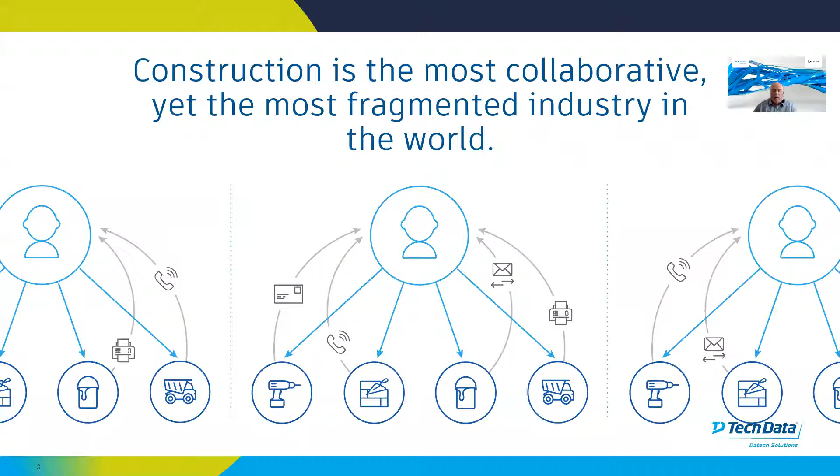It potentially exposes team members to not be working on the right version of reality. This primes your team to missing deadlines, decreasing productivity, making errors, and I'm sure that all sounds quite familiar to you.

The other thing we're looking at here is, as we know, margins are razor thin in the construction industry, the largest in the world economy. About $12 trillion globally will be spent on construction-related goods and services by the end of this year alone. It accounts roughly for 15% of the world's GDP and employs about 7% of the world's working age population.

So these low margins are also reinforced by a number of internal and external challenges, such as reinventing the wheel. Even though problems are often very similar, each project team still seeks its own solution, and there's no standardization.

Extensive subcontracting is a challenge for coordination and communication. And we're coping with complexity these days that we never did before. There's also a failure to adapt to new technology.

The same report also lists a number of important initiatives which the construction market can reform, providing opportunities to meet the challenges we've just seen, and to turn these ideas into real work processes. Basically, that's the goal of Autodesk.

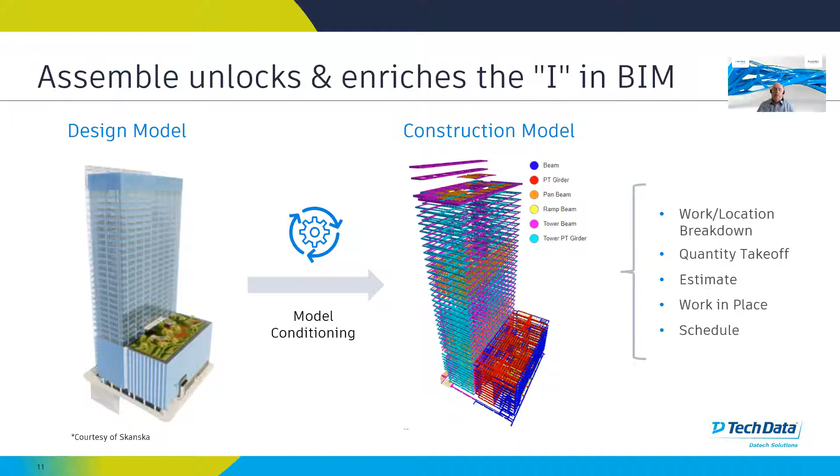It's also giving opportunities to make the handoff process from the pre-construction phase to the construction phase a seamless experience, with a number of important workflows on the left, such as automatic quantification, conditioning of models, and change analysis.

And I guess what we're really looking at is you. All of these workflows are based on what you need and what you want to achieve. With Assemble, you manipulate the data yourself so that it's relevant to what you need and want to achieve. You filter the data you need, and you group the data into the structure that is necessary for your work.

As a result, you immediately have the right quantities. You will have an immediate understanding of which data has changed with new versions, and you can add your results into the BIM model to share with the project team. This is how we get collaborative project teams.

Let's have a look at this in action. We're going to show inside Revit, and here you see the Assemble add-on. Let's put it in, and we get a ribbon. We just choose the right hub and then the project that this model needs to go to, and it will know all of the linked files, so we can actually upload all those linked files in one go.

As I said before, it's in any format. So if we do the same in Navisworks, you've actually got the Assemble add-in in here as well. So here we have two files, an FBX file and an IFC file.

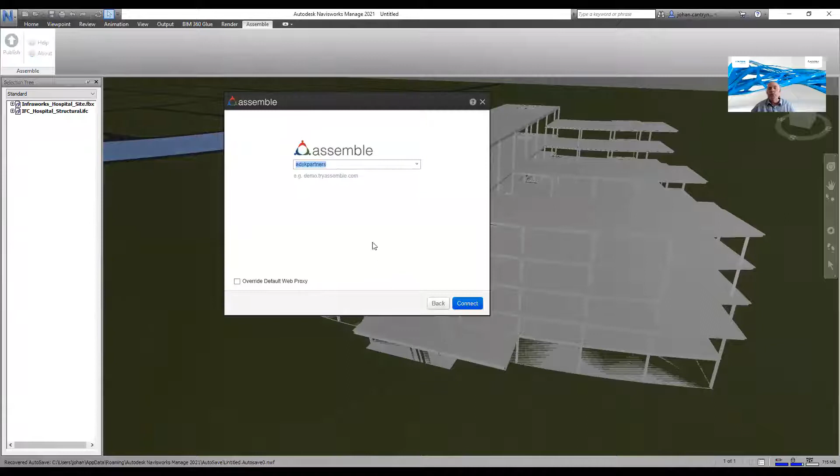All we need to do is go to the correct ribbon, the Assemble ribbon, and we have a simple button that says Publish. Again, we need to choose the correct hub, connect to that hub, and then choose which project that needs to go to. Again, we can choose which file format we actually want to send up. So if we wanted all of them, we just pick Continue, and all are put up there.

So this is Assemble. This is what we see inside a project. We're actually inside this project, and you'll see all of those models in there from either AutoCAD, Revit, or indeed Navisworks.

So now all the data is in Assemble, the whole team can actually review the models. Anybody you've invited can gain access to this. This can be done via iOS or a normal web browser, in which we can not only review the 3D models, but also the 2D sheets, which is important because they contain extra information.

The team not only has immediate insight into the complete model, but through real-time sectioning, we get an understanding of every detail. In order to make the right decisions at all times, we always have an overview of the spatial relationship. Measuring, isolating nodes, etc., are options that support this.

Let's have a look at that. In this case, we're actually looking at one particular model, and we can view this in multiple ways. We can actually start to change how we visualize this.

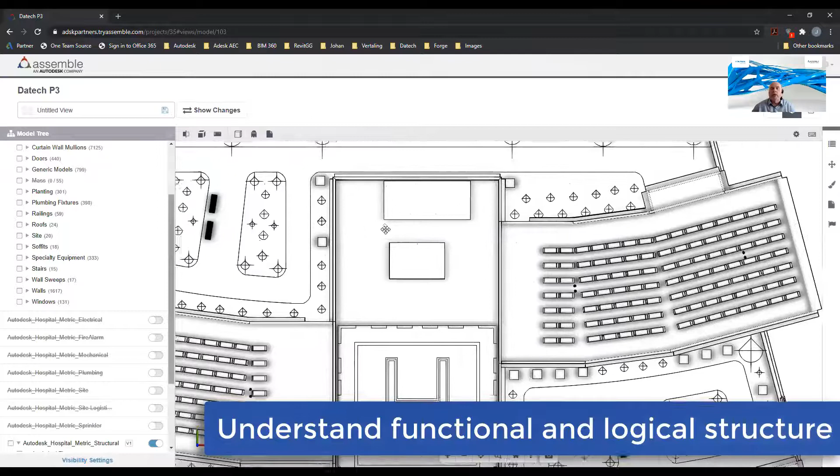So we can actually set, in this case, a hidden line detail. We've also got our set views that we can switch between as well. So here we've gone back to a shaded view on one of the elevation views.

So the other option is we've got the ability to turn on and look at the drawing sheets as well. All of the drawing sheets that are pushed up with the model are available to everybody, and we can actually see these side by side, whichever drawing sheet we want, alongside the 3D model. In this case, we've got an elevation.

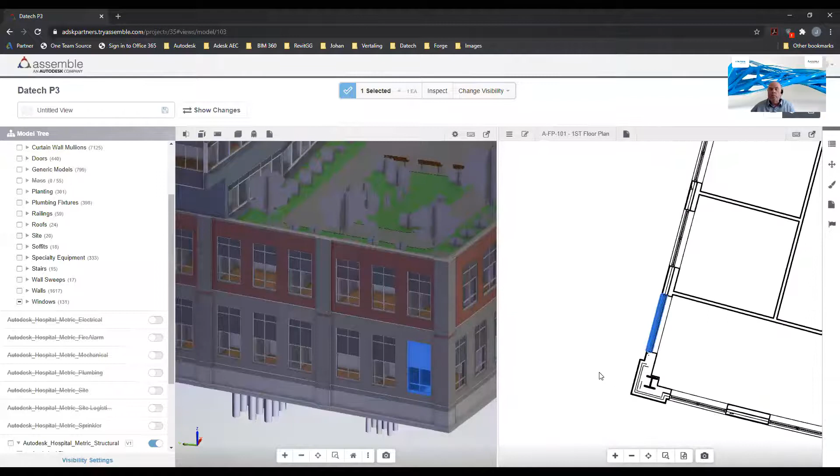Let's change the 3D model around to the same type of elevation. Now if we select an object in the 3D model, you'll see that the actual object is visible inside the drawing sheet, and as we click through we get the same thing. If we turn all these drawing sheets on, because we've got that window selected, it'll give us the drawing sheets that only that window is visible in. So we choose one here, it's a plan, and you can see it's still selected. Again, we get a greater correlation between the 3D model and the 2D drawing sheets.

And just like inside Navisworks, we can actually walk and explore inside the building, inside this viewer as well.

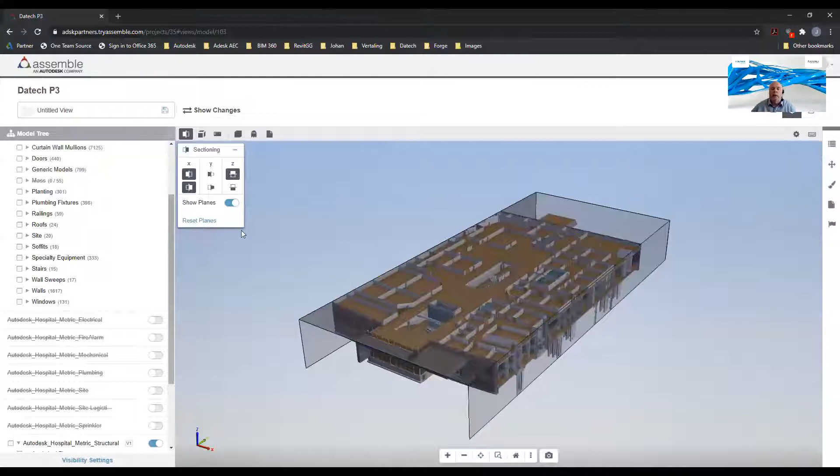As you can see here, we've also got cross-sectioning, so we can choose which axis we want to actually section this, and we get two cross-sections on each axis, so we can do exactly what we're doing here. Then we can turn those planes off so we just get the actual model, which gives us a better understanding of what's inside the model.

And again, we can start to change the visualization of this as well. So in this case, if we wanted a hidden line view, we can do so.

We can also start to highlight objects inside the model tree. In this case, we've got a specific door we're interested in. What I love about this is we've got X-ray vision - we can turn on the X-ray vision within that section view, and it will show us all of those doors within here.

And as with many other views, we've got the ability to start to measure within here. So we can put some measurements in and check what measurements we need. Even if they're not on any drawing sheets, we can create our own dimensioning.

So now that we've put the models up there, and put all the linked files in there, we can start to aggregate these models. So if we wanted to see a couple of models together, but maybe there wasn't a Revit model that had this information in it, we can do so on the fly inside Assemble.

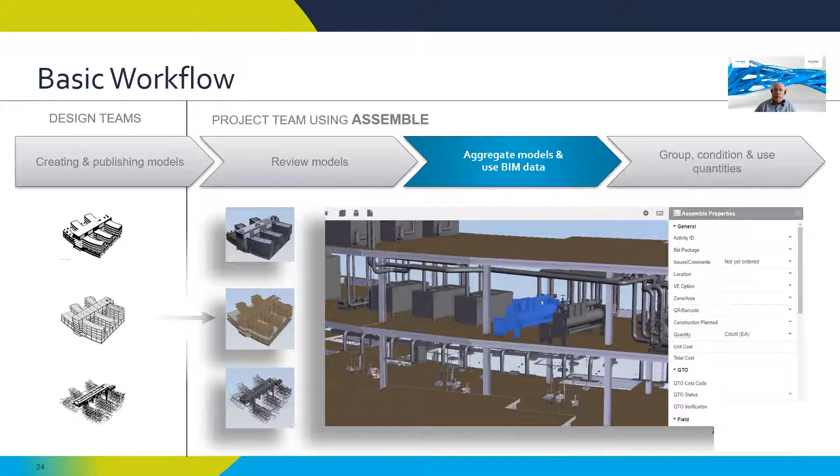The project as a whole is important to the team, and that's why we can combine models on the fly into one virtual project environment in which you then filter the data that you need for your job. With Assemble, we also have access to a rich BIM data source. However, a BIM model usually does not contain all of the data required during pre-construction and construction, and Assemble gives the team the opportunity to add this data so that it can be consumed by the whole team.

So let's have a look at actually opening a model up and aggregating a view for ourselves. We've got multiple projects here, so if we go to this particular project, these are the models. If we actually select one, in this case we'll go to the structural model.

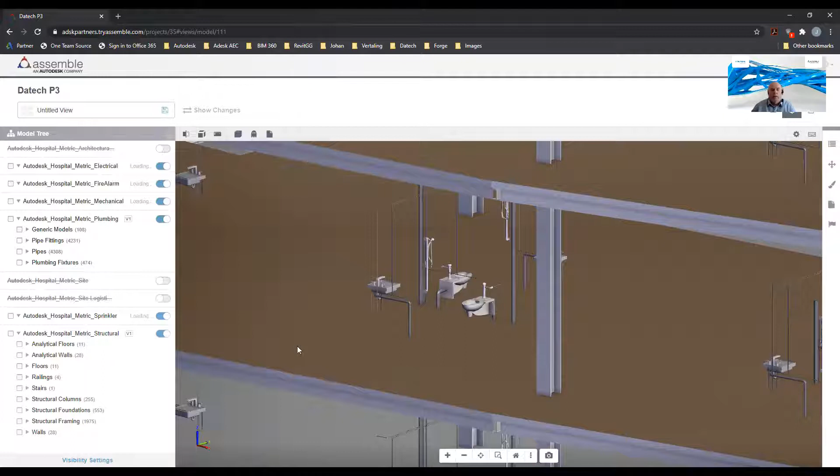And that's great, we can see all the structural detail, the information there that we need. But in this case, I want to see the structures with some of the building systems, so let's turn on the plumbing. Now we have both the plumbing and the structures together. In this case, we'll turn on the electrical and other building systems as well, and we can see this information together. So we've got control over what information, what models we see together.

And this can be stuff, again, from Revit or from Navisworks. So in this exercise, what we can do is just turn all of the different models on, so we can see all of these models aggregated together.

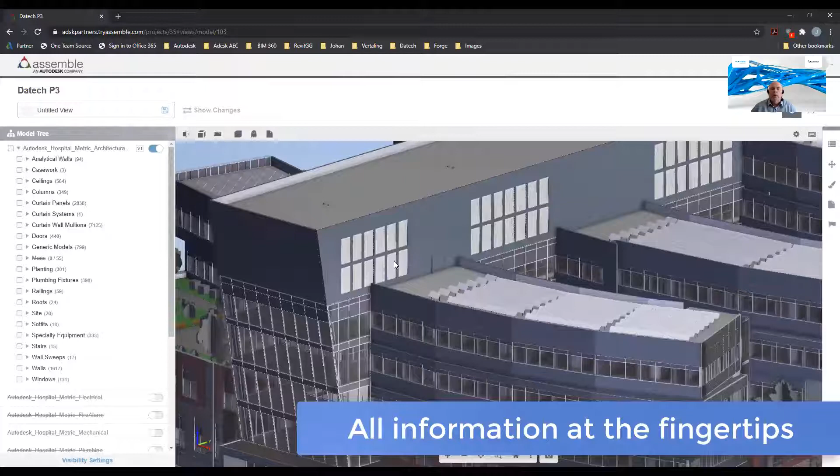So at the very beginning, we saw that the title here was Putting the I in BIM. So all that information is there. If you hover over anything, we get an idea of what it is and also the quantities.

We can also select an object and turn on the properties. These properties all come from, in this case, Revit, so we get all of the Revit properties available to us in here. We can check out dimensions and so on.

But we also have the ability to have Assemble properties as well. So in this case, here are our Assemble properties. You can actually create these properties as you want. In this case, we've got a bid package, so we're adding this to a bid package called brick walls, and we can give it an activity ID at this point as well.

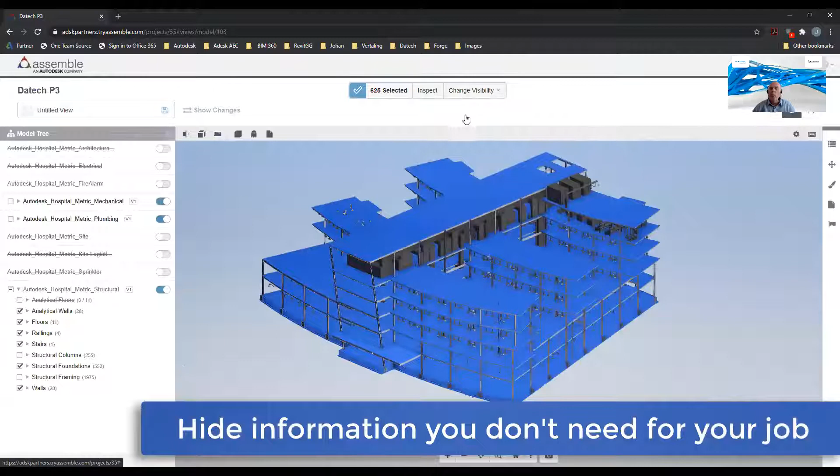And all this information can be seen within the model tree. So as we said before, it's the information you need to do your job. In this case, we're going to turn off some of these objects because we don't need everything in here. But we're also going to filter out some of the things we don't want inside a particular model. We want the structures, but in this case we only want the steels. We've also still got all of the building systems here, all the mechanical and plumbing.

Now, what is good is obviously we need this information back again, so another day we could come back for that information. We can save those particular views, and they'll be available to us and the whole team to view. So here we see a few views that were created. If we wanted to get to the field steel view, we just pick that view and everything's preset for us.

And the same thing if we just wanted to see, in this case, walls. This is for a quantity takeoff, so if we want to do a QTO on just the walls, this is the view we actually need. And if we need that information to go to other people in the team, it's available for them as well.

So we've seen how we can aggregate all our models to start to see the information that we need. Now we'll take a look at how we can further Assemble's ability to group, condition, and use quantities.

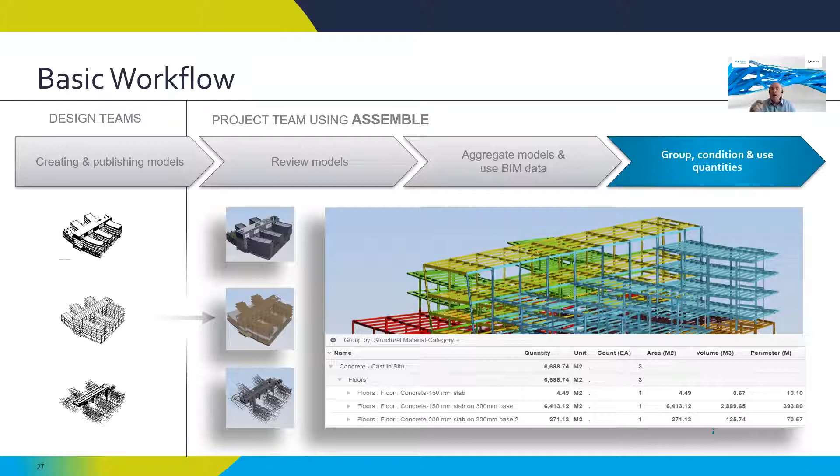Now, I think this is where Assemble sets itself above anything else. Via the inventory, we get a global view of all of the BIM information, and it also automatically shows the quantities using any structure per object, per level, per work package - you can choose yourself. Of course, you don't always need all of the data, so with the dynamic filters, we can determine exactly what you need for your job.

And to gain a better insight into the data and also to improve communication with other team members, we can automatically assign colors based on the BIM information, as you can see on the screen here. And then you save the condition model so that other team members can use this information - again, another proof of Assemble's collaboration. So let's have a look at how we can do this.

So in this case, we've got the 3D model here again, and here we can see the doors. We can actually specify specific doors. We can see that it's listing out walls and all of the information that we need. But if we wanted more information, we can do so.

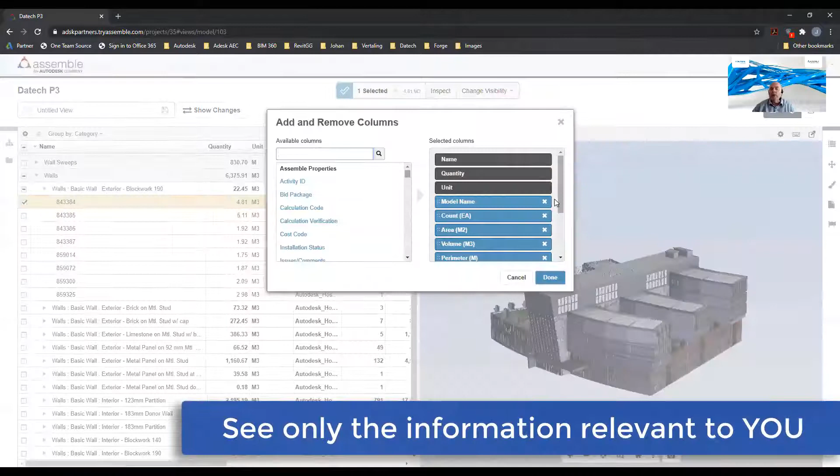We can choose which columns we see, so you can determine what columns you don't need. In this case, we don't need perimeter, but we might need, in this case, the function - whether it's an external or an internal wall. Then maybe the structural material - we might need to know what the material is for that particular wall. And then it'd be great to separate this out by level.

So now if we look at the walls, you've got all the information you had before, but now we've got the function, the structural material, and its level. So again, we can see not only this information in the structural team, but the actual model changes as well. So in this case, if we highlight the rectangular ducts, we see them highlighted inside the model.

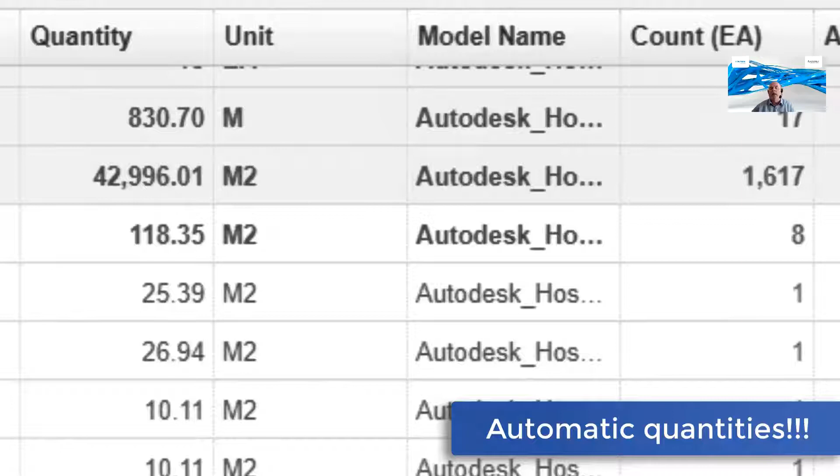So it's not only just the information that we've got there, but we've got those quantities, and they're intelligent quantities. In this case, we've got the length of that particular steel. And it also groups the information together, so we can see not only the individual quantities, but we can see the grouped quantities as well.

Okay, so in this information we've got things like doors. Doors are set to each. It's exactly what we need.

And if we go to, in this case, the railings, here we've got a pipe railing. We actually have the length of pipe railing.

And again, with the door, with the walls, we've actually got square meters, but we can change this. So if we wanted to see cubic meters for this, the volume rather than the area of the walls, we can do so by changing it in the properties. It will automatically change in the actual tree that we see here.

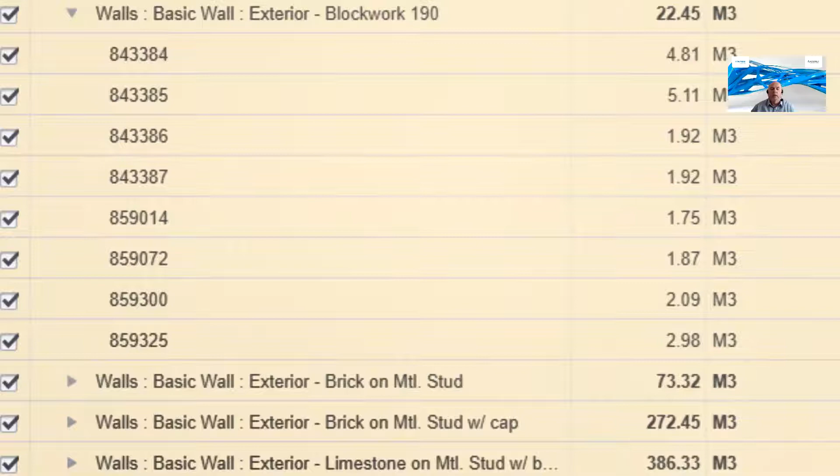So in this case, we're going to see three examples of how we can structure that information together. At the moment we've got everything grouped by category. What we're going to do is tell it to show only the walls, but we only want walls.

We don't actually want curtain walls in here. So we can filter the view to only show us walls without curtain walls. Now we can only see those particular walls, which is great.

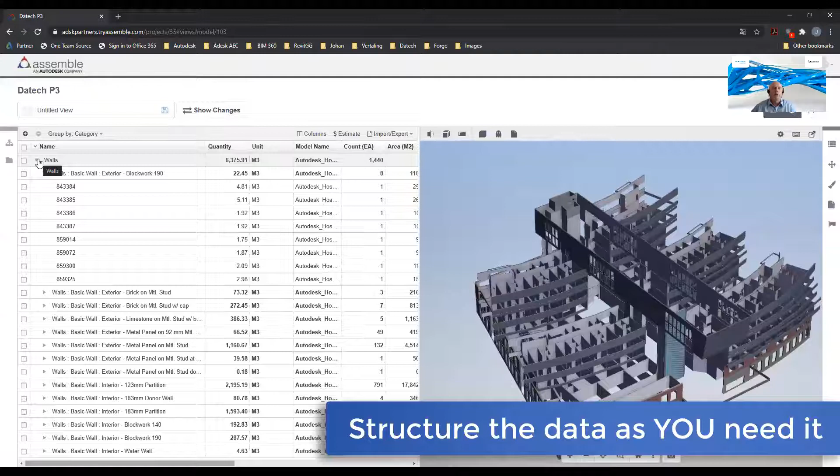But we need now to maybe group this differently. We don't just want walls and the type of walls. We actually want this grouped slightly differently. So we're going to change how this is grouped by, and create our own grouping.

In this case we'll just call it walls, function, level. Remember, we turn the function and the level on. So we want this grouped not only by walls, but by function, whether they're external or internal, and then the level as well. So we're changing the structure of how we see this tree.

So as you can see here, we've got the exterior or interior and then the levels. And we can actually view this - if we highlight these, you see the levels appearing on the model as well as highlighted objects. And again, after that, we see the type of wall and then the individual walls as well.

So why not, let's color this information. We're going to color this by its function. We just choose the function option and we can choose whichever color we want to view this as. And we get the color dot appearing in the listing as well as on the model.

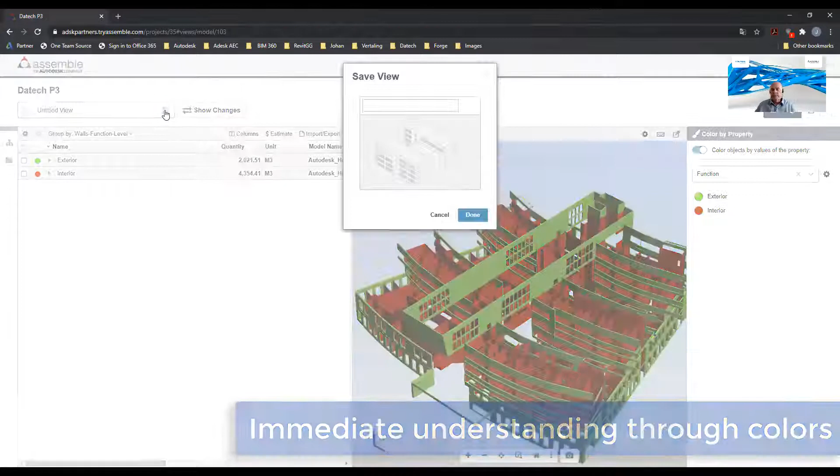And obviously we want to get back to this particular view, so let's save this. And this will be available not only to us, but again, to the rest of the team.

So if we look at the same type of ideas for the structural guys, again we've got a structural view, but here we only really want the steels. So in this case, we're going to start to ask only to see structural columns and structural framing.

But we actually want to filter it out a little bit more as well. So we're going to filter it so the material has within it the word steel. It doesn't have to start or end with it, it just has to have the word steel within the material.

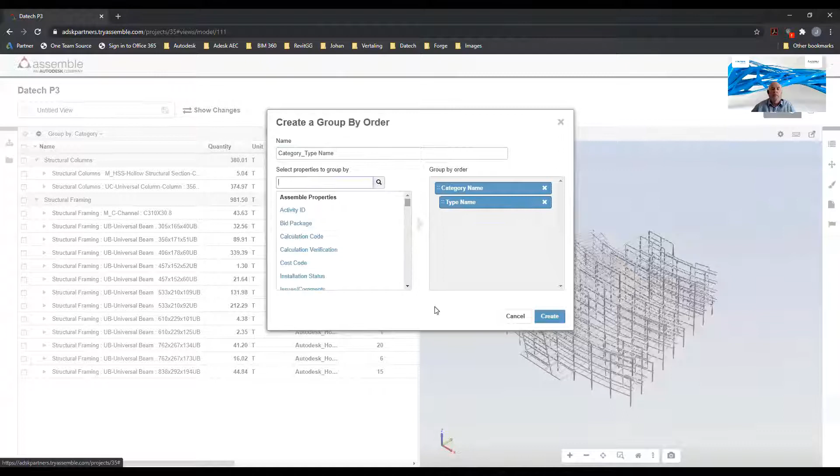And again, we've got it grouped by category. We need to change this as well. So we're going to group this by category name and type name. So for this particular view, we've now changed our structure - we have the columns in one and the framing in another.

So in this case, it's actually showing us the units by weight. So we're changing this to length. Now we actually see the actual length of all the materials needed for this framing and the columns.

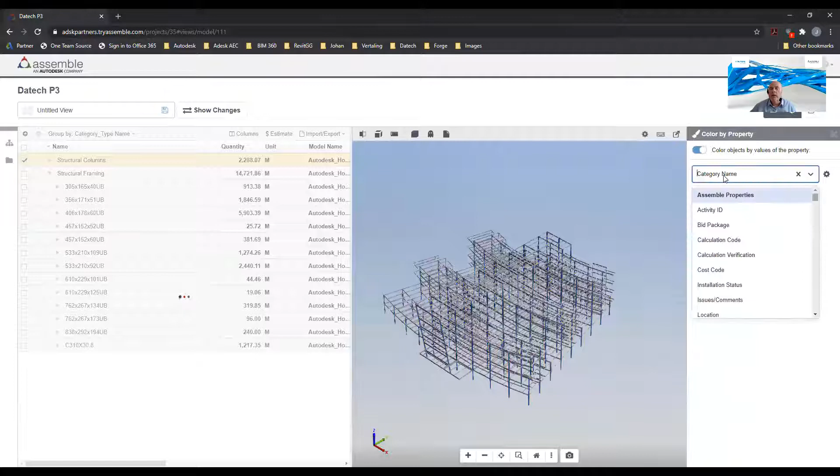And finally, what we'll do with the structure is we're going to change the color. So we're going to color this by the type name. And again, if you want to, you could change these colors.

So there we can see the colors also in the structural tree. And as before, we'll save this information for others or for us later on.

So finally, for those of you working on the MEP side of things, we're going to do exactly the same. In this case, we need to turn on the mechanical and the plumbing together, but we're only going to ask for pipe fittings, pipes, ducts, and duct fittings. We're not going to filter out anything other than that, but we will change how it's grouped, further down, using MEP classification and system classification, then category name, family name, and type name.

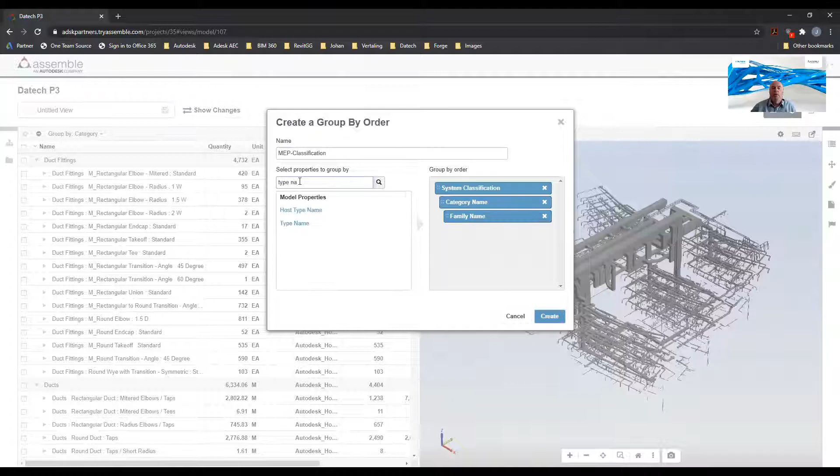So you can actually see now we've got supply air, we've got the duct fittings, we've got particular ducts, whether they're round or rectangular, and we can set those out. Something I really love on this one is the ability now to color this by the system classification, so those into the building system side of things get a better idea of their classifications just in that particular view.

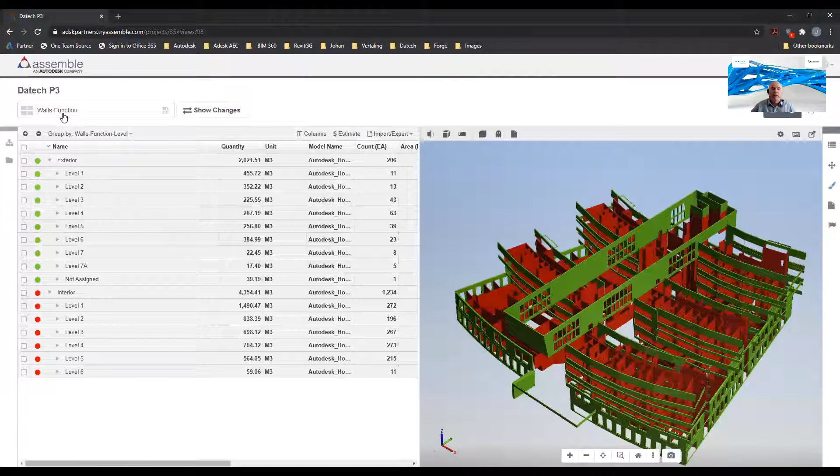And again, we need to save this information so we can get back to it, and there's all the information here. So with just one click, we can go back to that particular view, and you can see that the group by is set, and we can then choose which one of the others. Everything's saved to get back to, for us and for the rest of the team.

Okay, moving on now. Let's see how Assemble fits nicely into some specific workflows, and we'll start with the quantity takeoff process.

So as you can see, we can get the quantities that we can verify either from the tree structure, by the listing, or we can use the actual model at this point as well. For people involved in the QTO, the quantity takeoff process, it's extremely important to have immediate access to the quantities, and this is what the inventory allows us to do. But we also see quantities immediately in the 3D model themselves, so everywhere we have access to this information.

For example, the estimator can validate and calculate the models via the model as well as via the inventory, but both are only views on the same data—it's exactly the same information. If you select an object in the inventory, it also happens in the 3D view, and this gives the estimator a complete understanding of the job.

So we can also enrich this information. We can actually load up these preconfigured cost codes that we can use in this case, and you can upload your own cost codes within here. So we can enrich that information, and we can start to add objects to a particular cost coding.

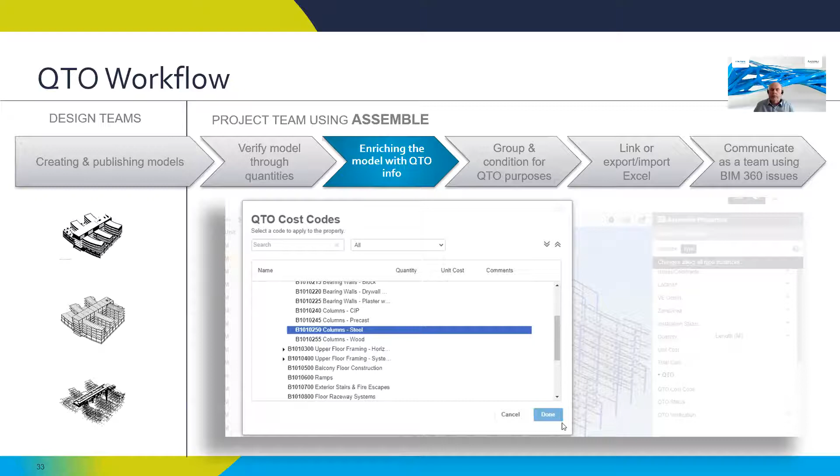So in this case here, as an estimator, you'll also feed model information as well. Not only are we just taking the information from the design team, but we're actually feeding information back in, okay? That information is important to other team members, not just for yourselves. If you consider, for example, cost code structures that can be imported into Assemble, possibly the cost price that you also want to have in the model as well.

And as we've seen before, we can also group the information and start to condition this. So again, we could have a QTO grouping conditioning view. In this case, you can see here we've got the steels, and we've conditioned it so it colors anything that's done, anything that's open, or if there's a design issue that we need to report back through to the team.

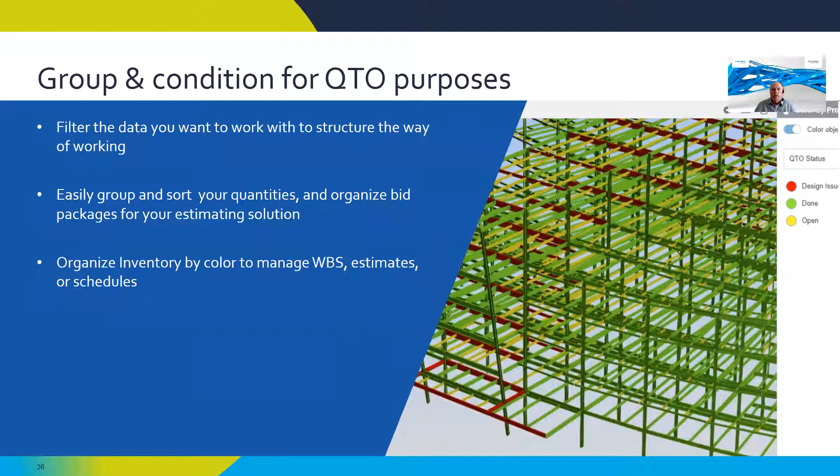And as you can see here, we can filter that information and group that information as we need.

We can also start to link to Excel. So we can actually link this information through to an Excel spreadsheet, and we can export and import that information from Excel as well. Basically, it just means that we can update that information inside the spreadsheet, and because it's linked, we can synchronize that information, and that information goes back into the model as well.

So as I said, there's the ability then to link that information, and the nice thing is it's not just held within a spreadsheet. You use the spreadsheet maybe to do the costings, for quantity takeoffs and that sort of thing, but once you've done that, you may be doing more calculations, and that information can then be fed back into the model.

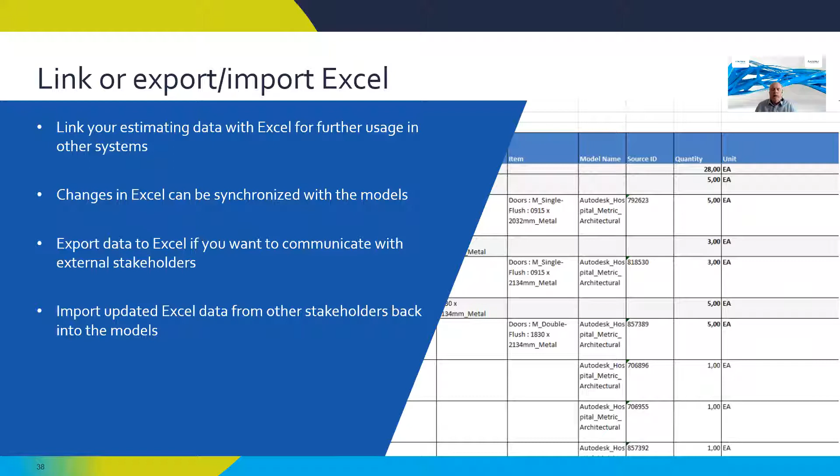Now, we've also got the ability to communicate to those that are using BIM 360, so we can start to link these files to a BIM 360 account as well. And if there are any issues, maybe some design issues that we need to sort out, if we're a little worried that people may not just be in Assemble, they may be in BIM 360, we can start to create issues inside the model that will actually be fed back and controlled inside BIM 360 as well.

As I said before, we can actually export that information back not only from the spreadsheet into the model in Assemble, but we can also take that back through to the model inside Revit. So in this case, and we'll see this in a video, we actually got the manufacturer of these doors, the coding, and also the data that's needed for that particular information. So like I said, we can import that back through.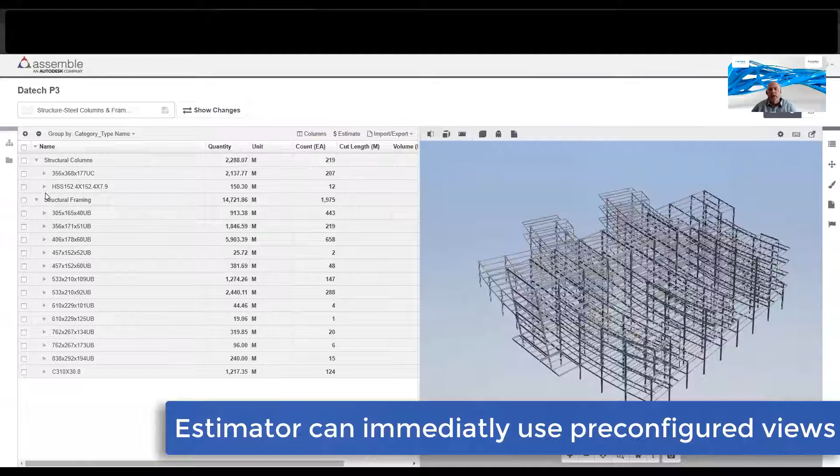So here's the QTO workflow as an example. In this case, we're going to choose one of the set views. Now, again, the estimator in this case can see all the information here, but they can actually then select on here and see that information inside the model and vice versa. So again, it's actually grouped exactly how they want.

So in this case, if we look at a particular structural column, the structural columns, we can see the properties and also where they are within that particular project. And we can see individuals as well. And what is quite nice, we can actually zoom into that particular object so we see exactly where it is in the model.

It's not just a list of steels that are required to do the quantities. We can check that, but we can also use the model itself. So again, hovering over an item, we actually see what type of object it is, and in this case, the length as well, and all that information.

So if we actually highlight all that information, we can actually see more information that we need, and we can turn on other columns if needed. So if we wanted to add information in now, if we actually select all of this information, we can actually see the properties for everything in one go.

So in this case, we're actually going to add this information to a bid package. Steel columns and framing is the name we're giving to that bid package.

Now, if we highlight an individual type of, in this case, column, we can then actually add these cost codes. So these cost codes can be predefined. We can actually load them in. We can load them in from another package via an Excel spreadsheet. And then we can actually see.

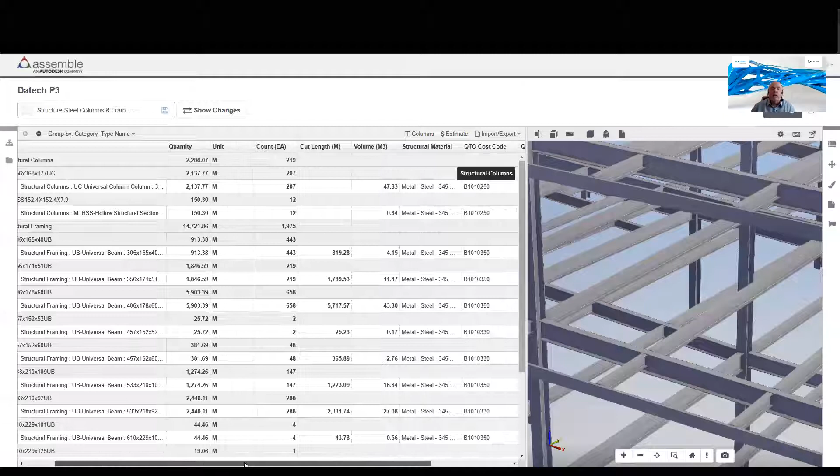So we've actually done the quantity takeoff for this, and my colleague Johan's just putting his name to that as well. So now we can see that information here. So straight away, we can see whether a QTO status is done, the cost coding, and who actually did that QTO.

And again, we can actually change how we view this. So we could view it as a QTO. So we can see if we've got some design issues that we actually need to ask questions of, and we can see what we've actually done and what's open. So if a colleague is now taking over, that colleague knows what needs to be done.

And to make it easier, we can actually do this by color as well. So we can actually change this to a QTO status, and now we have a color for each of those statuses. And we can do a traffic light type scenario here.

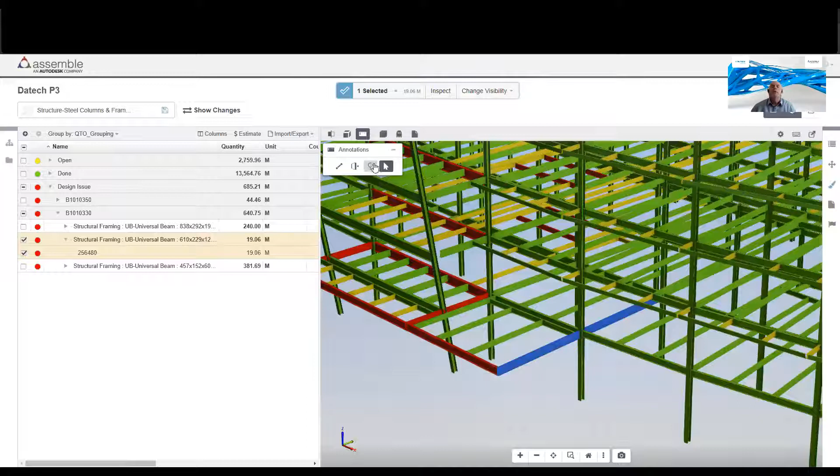So obviously, if we've got some design issues, we might want to feed this back to our team that are using BIM 360 docs and build. So all we need to do is create a little pin in here and create an issue. This is much the same as if you were using BIM 360, creating issues. We can assign it to a person or a company or a group of individuals, and we can push that through.

Now, at the moment, the BIM 360 linking is only available if you've got BIM 360 on a US site. If you've got an EU site that you're using for BIM 360, we can't do the BIM 360 linking as yet. It's on the roadmap, and we're hoping that very soon we can actually do this for projects that are on the EU server.

So this is actually inside BIM 360, and this is the information we see. So here's Johan's issue that he created inside Assemble. He can see it inside BIM 360, and anything that's changed also gets pushed back into Assemble as well.

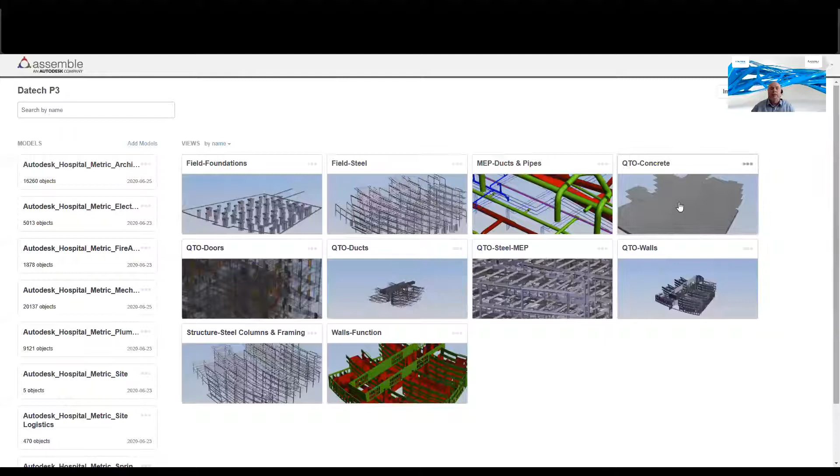So as we said, the data linking inside using Excel, we might want to push this information out to Excel for somebody to do the quantities in Excel. So here it is. We've actually linked this, and this is an Assemble ribbon inside Excel. Again, another download that you can add. So here's the file.

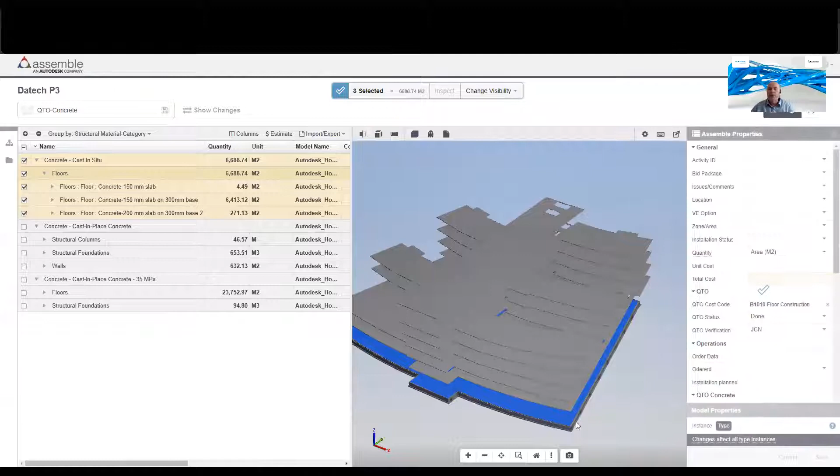So here we've got some quantities that are still open. Now we may have just done those quantities, so we can actually then see that information inside our properties. And in here, what we've got is now we're changing that to open, from open to done. And now all we need to do is synchronize inside Excel, and it'll change to done inside here, just with a click of a button.

So obviously inside Excel, we might want to do other things. In this case, we've got a volume plus a waste. So whoever's doing the quantities might want to start putting some other information in here, like the quantities plus waste. We can do this inside Assemble, but if it's done inside Excel, we can just update that, synchronize, and it's then available inside Assemble.

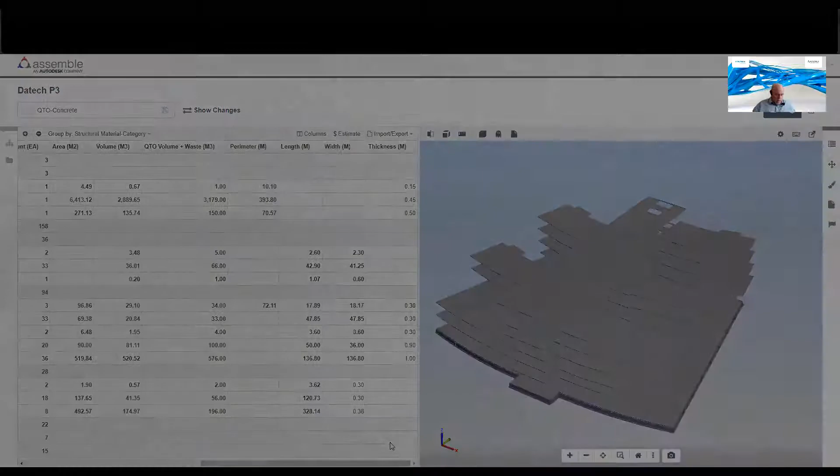So here we're going to export some more information. In this case, we're looking at the doors. So again, we just export that information. It will always do the name as the file name plus the date and the time. So if we open up that Excel spreadsheet, we see all that information from that particular view for these doors. So this is the Excel spreadsheet.

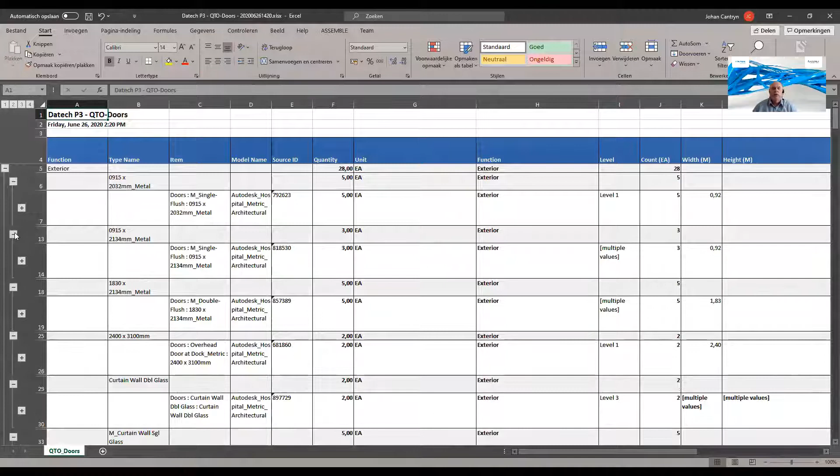No need to use templates or anything. This is how it actually pushes the information out. So we can actually see it's actually linked to how it's actually inside Assemble. So again, whoever's using this quantity takeoff, they might want to now fill out the information such as manufacturer, the product data, and so on and so forth, including the costs.

And as before, we've actually got the Assemble ribbon where we can actually then synchronize, or we can actually just import that information back into our Assemble. And all that information is there for us straight away into Assemble.

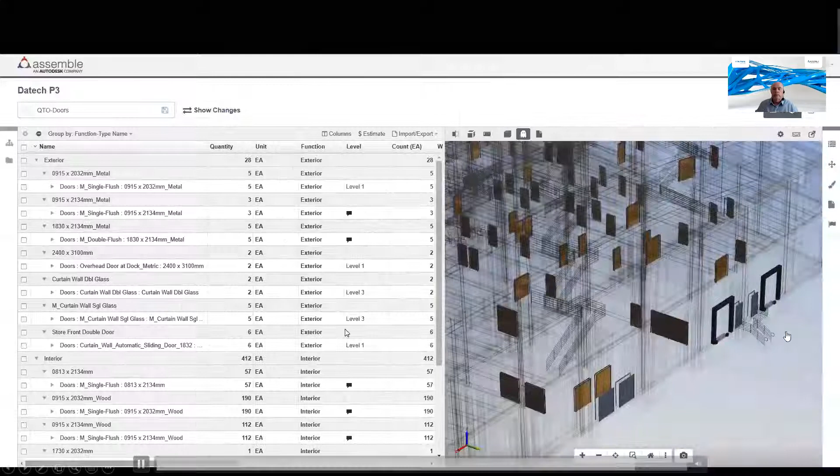So in this case, we're going to change the color properties to manufacturer. And as I said before, that information, we don't want that siloed inside just Assemble or that spreadsheet. We want it back into Revit. So just inside Revit, we can automatically sync. We just make sure we choose the right file we're syncing and the view. So the view that we've actually created before, we're actually just choosing that. And then straight away, we get that information straight back into Revit.

So we're also now going to have a look at the pre-construction workflow. In this case, we can start to create, we can prepare work packages exactly the same way. We can then dynamically filter all that data that we need, and we can use object properties to create those filters. And we can also then use colors to emphasize information.

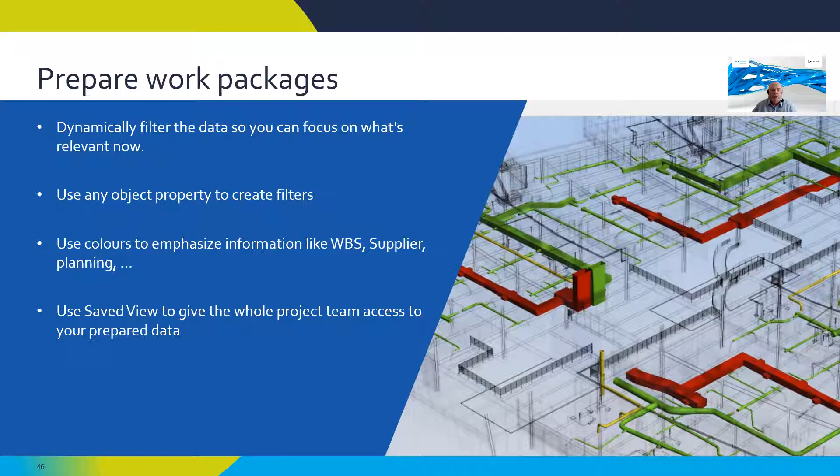So again, you can verify what is actually needed and how much. And then again, we can actually send that information out to the supplier via a spreadsheet. And the beauty is that any changes, we can actually update that information. We'll see this in the video.

Again, we can enrich that information. So if maybe I'm the person who is actually ordering this information, I can actually assign to objects, whether they were been ordered, yes or no, and the actual order date as well.

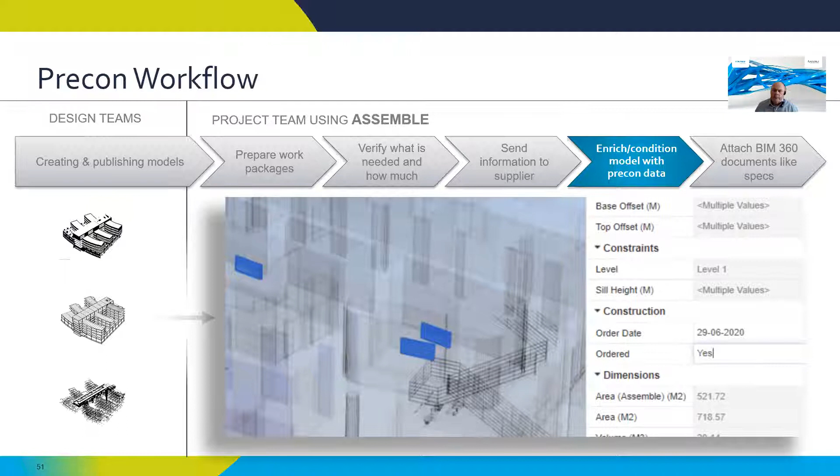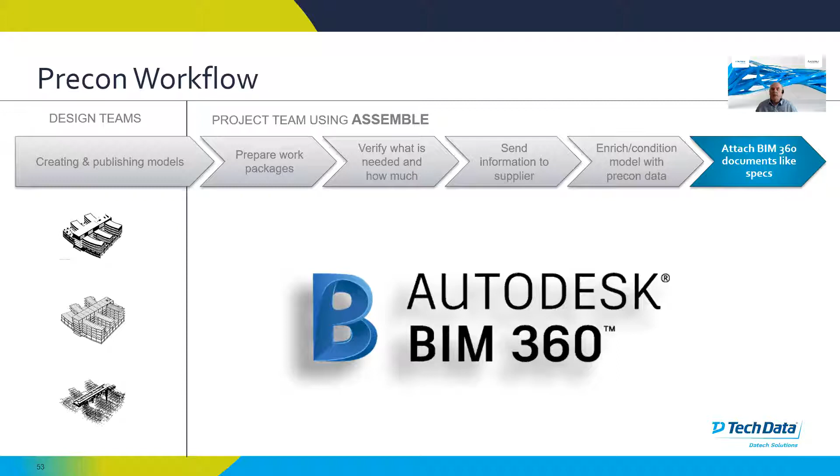Obviously, if we've actually linked, if we're working with BIM 360, there may well be information, maybe just PDF files, that we actually want to link to that particular information. So we can actually link that information from BIM 360, again, currently on the US server, soon to be EU server. We can link that information through within Assemble. So yes, like I said, we can attach that documentation, whether it be a DWG, a Revit file, or anything else, or in most cases, in this case, a PDF. So we can see that information in the video.

So again, we've got all our views set up. So in this case, what we're going to do is we're actually going to look at, so we're looking at structural, architectural, and mechanical.

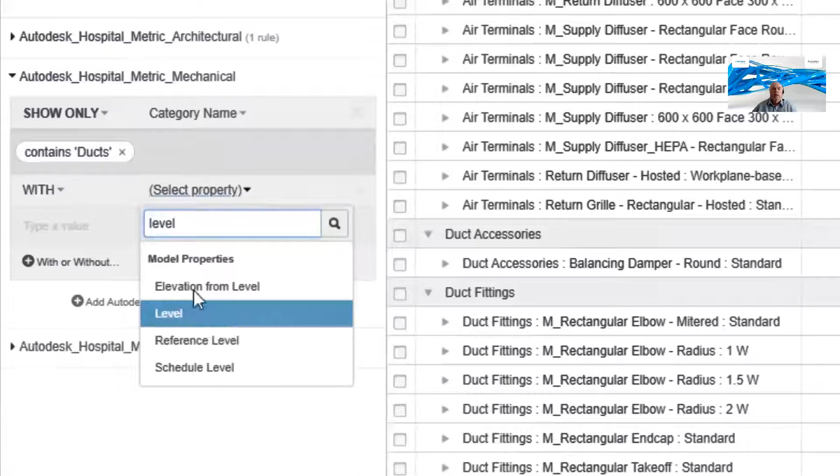And we actually start to hide bits and pieces. So although we're looking at all of those models, we can start to hide other bits and pieces as well. In this case, we just want to have duct systems, anything that contains duct within it. And we're also going to do this by level, because we might want to separate this information out by level. So here we're seeing level 4, colored by system classification.

Now we're also going to put a section on in here. Though we're only asking for a particular level, I want to put a section on because I want to turn on the X-ray option as well. So here's all our duct information.

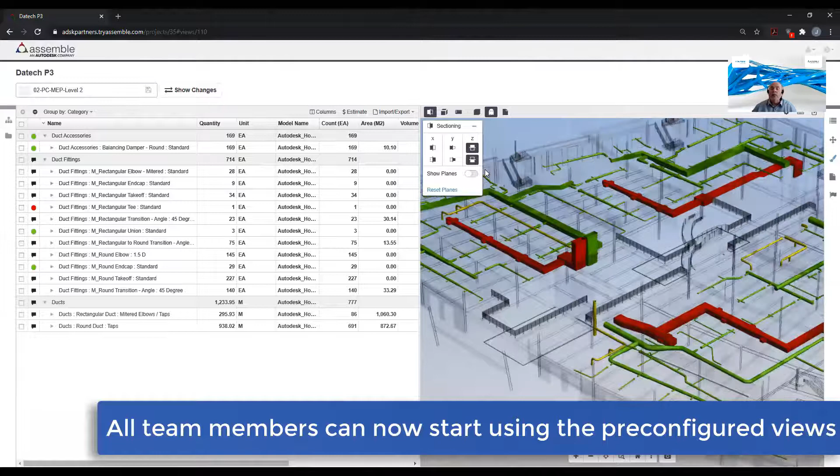And we're going to choose to have the other bits and pieces in here as well, as an X-ray view. So although we're only seeing a particular level of ductwork in here, we want to see it in place, so we can see an X-ray version of the actual model as well, the rest of the model, which we needed the section for. And again, we can save that information. Now the beauty is, in this case, we've done this per level, so we have a different view per level.

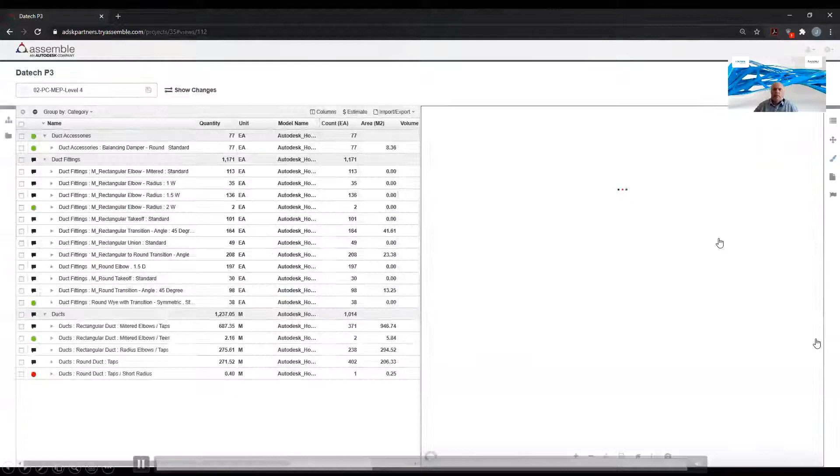So we've gone back to level 4 here. We've now created all those levels and that information. So now we're ready to order that information for that particular level. Let's start with the doors now.

So this is level 1 doors and windows. Now we're going to turn those doors off, and we're going to create another version. So this is our windows option in here, so we can choose our windows. All that necessary information is all within our view, and then we can export this information.

So here we've got, we're going to change this to order windows, and it creates our spreadsheet for us. So if we open up that spreadsheet, just to get an idea of what the information is in here, so that we can send this information out.

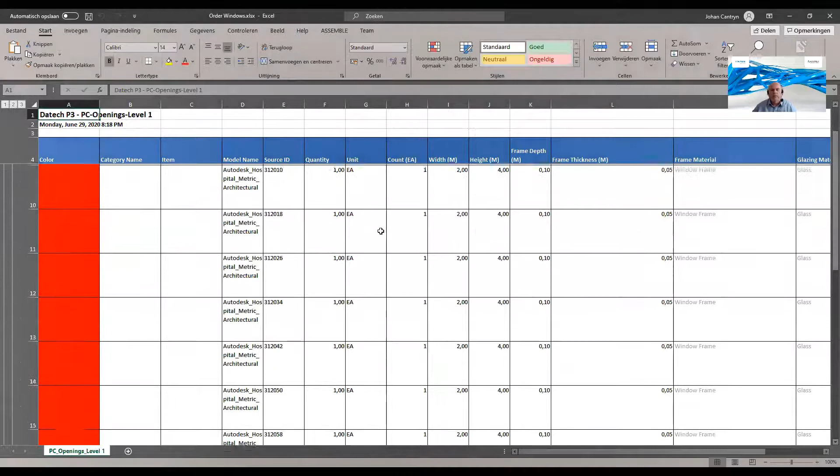And here Johan is now emailing this to Peter for his window order. So this is our level 1 windows now sent. And obviously, because he sent that order through, he needs to update. So this is a construction property. He puts that order date in and says, yes, it's been ordered.

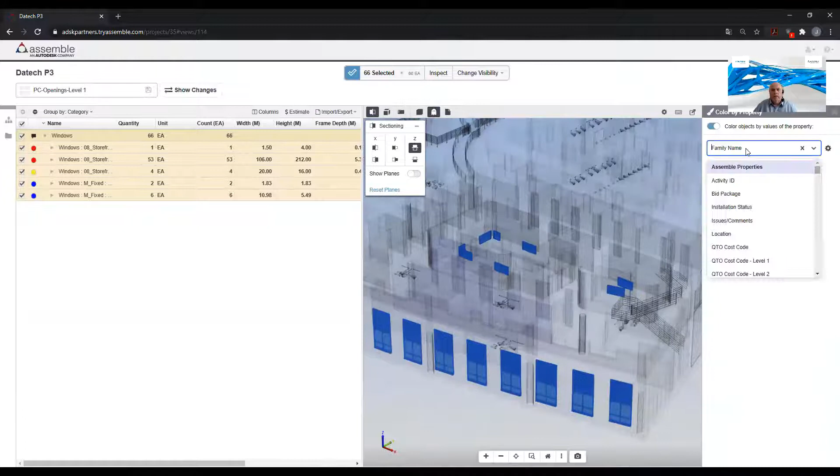In this case, we're actually going to color this by whether it's been ordered or not, so we get a better representation, so we can see what's actually been ordered and what's not. And again, we can either update that existing view, but in this case we're going to create a new view. So we're going to do a Windows ordered view.

So again, we're now syncing that information. So this is our Windows ordered information. Now, even inside our Revit model, we actually know what's been ordered or not. And as I said, if you wanted to link the BIM 360 information, we can highlight more than one object. Now, because we've linked this information, all of the project files are all available for us.

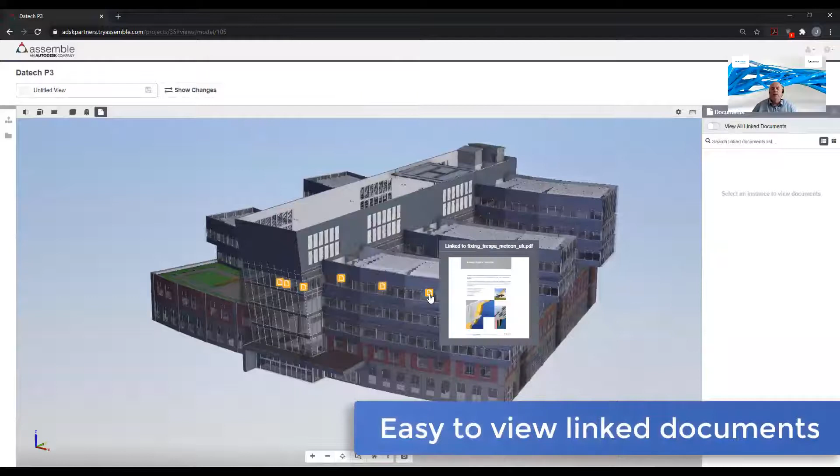So we can start to link PDF files into Assemble, and we can see this. We can turn on the hyperlink option in here, so we can see what's actually linked. And if we hover over that, we can see the actual document, and we can even open this document. And this will open it directly from BIM 360.

So next we're going to have a look at the field workflow, bringing that data, I guess, to outside in the field. Now, this is primarily done by an iOS device. So if you've got an iPad, it's only iPad at the moment, but Android should be with us very soon. But again, we can start to view the model.

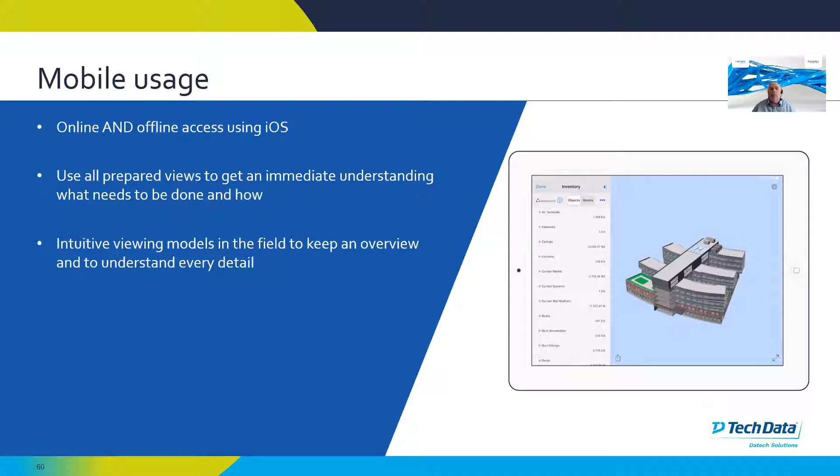You can use this offline and online, so you can sync the data on the iPad. So if you've got no signal out on site, you can make sure you take that information with you from the office. Again, we can start to see not only objects, but rooms, so we can see those objects and quantities out on site. So basically all of the information we've got in Assemble on your desktop in the office, we've also got on a mobile device. And again, we can see how they're actually grouped exactly how we need to.

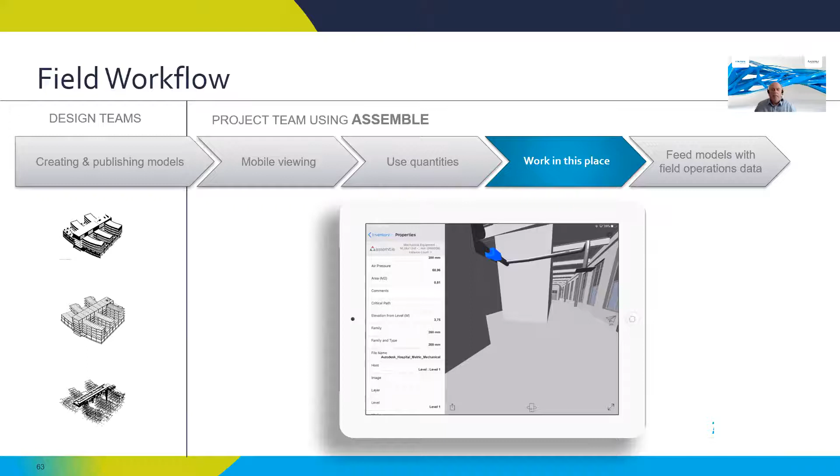Again, like I said, we can actually work in place, so we can see exactly where we are. We can go to a particular room, be in that particular room, and move our iPad around to see exactly what we're looking at on the model as well.

It gets great use of barcodes or QR codes as well. So if you're not sure exactly where you are within the building on the model, if you've got a QR code that you've assigned to a particular location, you can scan that QR code, and it will put you in the model exactly where that position is.

We can also update information. So if we're going around, we can also note whether an object is actually installed or not. We can go around, choose a window, find it on the model and say, yep, that's been installed. That information will then be synced back through Assemble and even into the Revit model as well.

So let's have a look at that in practice. So this is our iPad, and these are the models we've actually got access to.

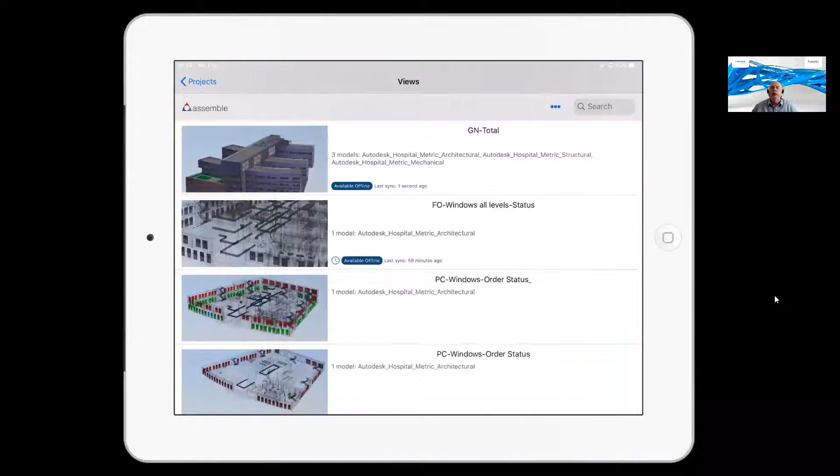You'll see we can make a view available offline, and it will always tell you when you last synced. So if you feel that it's likely been updated, we can sync that information for us as well.

Here we can see the normal navigation, with pinch and pull options for zooming in and rotating around. We can also use camera presets, so if we just wanted to see the left side of the building or the plan and so on, we can choose that. Really, really simple, so we don't need to always just twist it around.

We've also got the ability to start to section, just like you could with the viewer on the desktop or inside the internet viewer. And again, we can start to create some really smart sectional views.

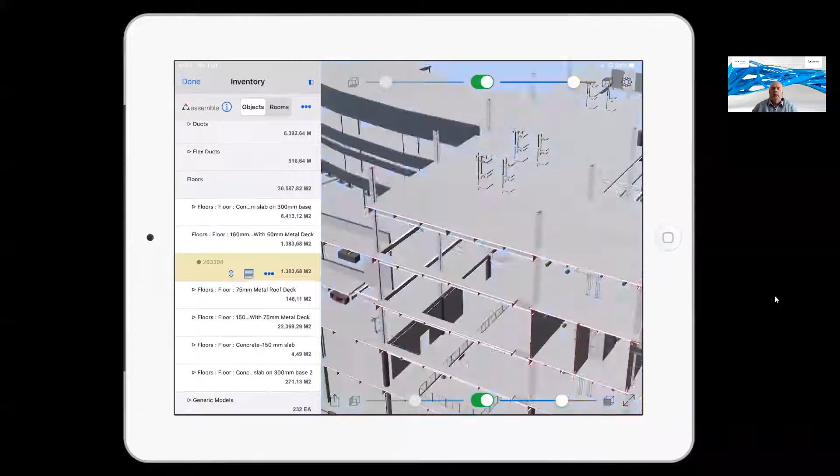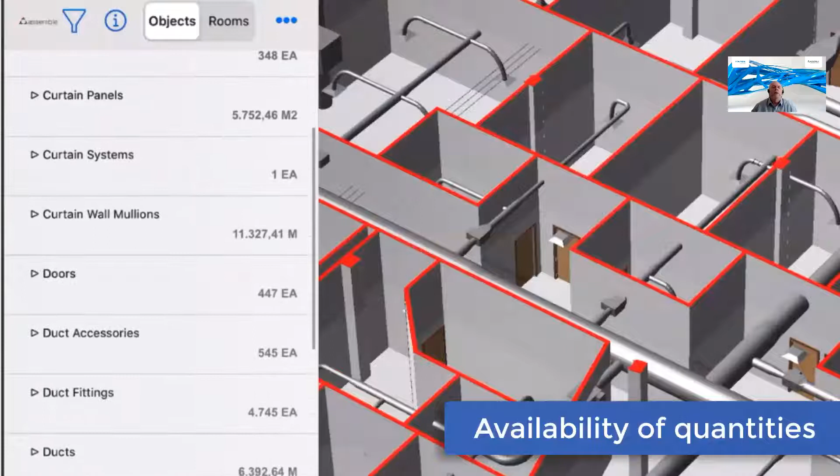We can also highlight objects and see that information as well, since it's data rich. So if we wanted to hide, in this case maybe the ceiling, we can pick that and hide it so we get a better view of what we're actually wanting to see. And there you can see it's hidden, and now all our objects are available for our quantities.

And as it says, quantities on all object levels. So depending on what level you're on, you can start to check the quantities for that particular level.

So here we've selected 3 items. We can then ask to view those items, and it will just view those objects and a section view of that as well.

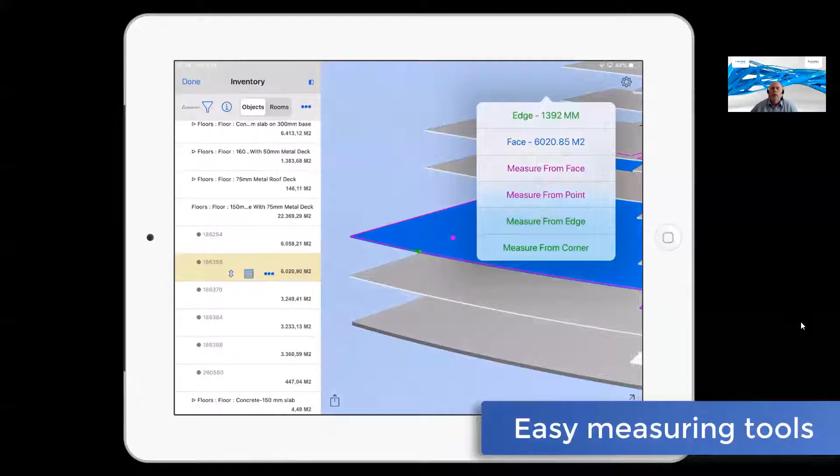We can start to measure. So if we wanted to check some dimensions on the model, we can also then check them against the actual constructed building. So again, straight away we get ideas of dimensioning.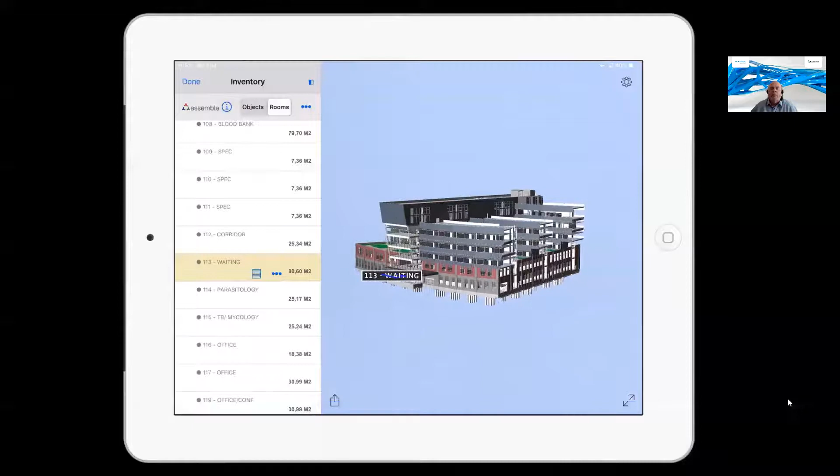In this case, we're going to be inside one of the rooms, so we're going to switch to rooms. It then gives us our room numbers, and we can start to search for a particular room. So I'm in room 113, so I need to go and see where that is on the actual model. There it is on the model, highlighting that particular room.

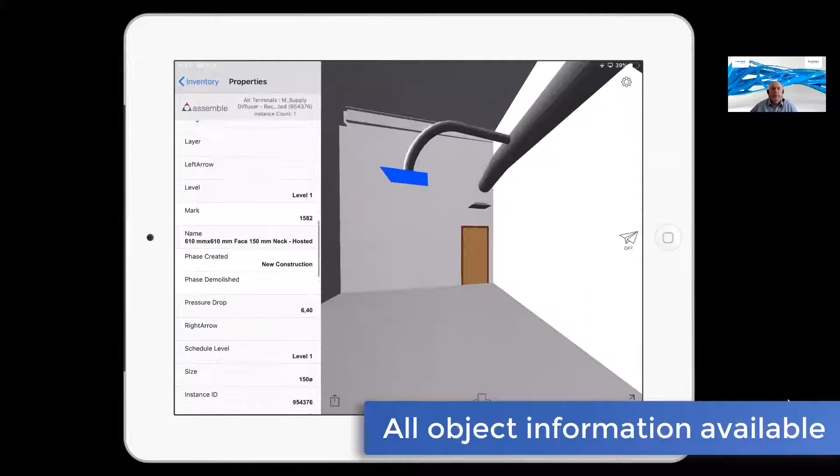But I can also get into that room as well, so I just pick the option to actually go into the room. There I am in that particular room. Now I've got the iPad, and I can move it around and tilt it as I move, and I can select objects in the model to make sure what I've got in the actual building is exactly what it says in the model as well. And there you can see all of the details, all of the properties for that particular air terminal.

So I just tilt my device around, and I can look around that particular room. As I walk around, I can just tilt the iPad forward slightly, and it will actually walk with me inside the model as I walk. In this case, the ceiling's not there yet, so I need to hide that so I can see more information. Here we can start to see our duct system, and I can pick objects in here, which gives me more information about that particular object.

As I said before, not only can you do locations by searching, we can actually go straight to our QR code or barcode, and that will put us straight into the right spot. So if we didn't know what area we were in and just wanted to make sure we were in the model, we'd use the barcodes. Make great use of the barcodes.

In this case, we're going to have a look at the structural foundations, a particular view we've got in here. So this is set by a particular view. And in this case, we can also do it by area as well. So here we're looking at the type of work being done, the flooring areas. Again, we've got a view set for that particular job.

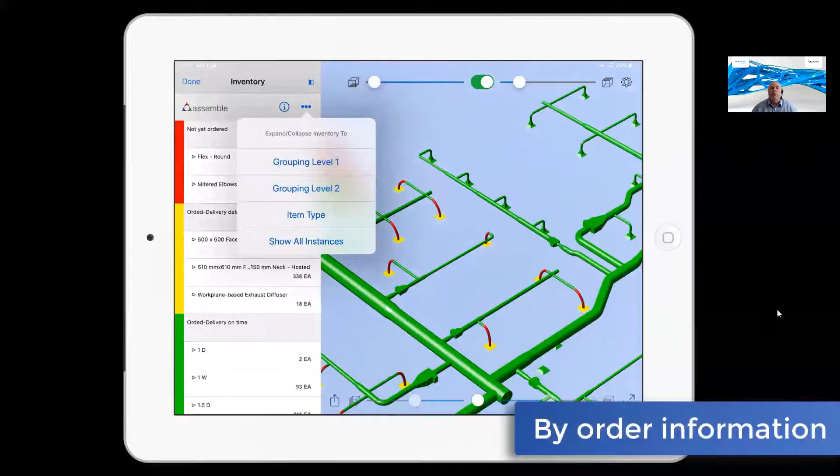And here again, going back to the duct fittings, this is by order information, so we can actually start to see what's been ordered and what's not been ordered yet.

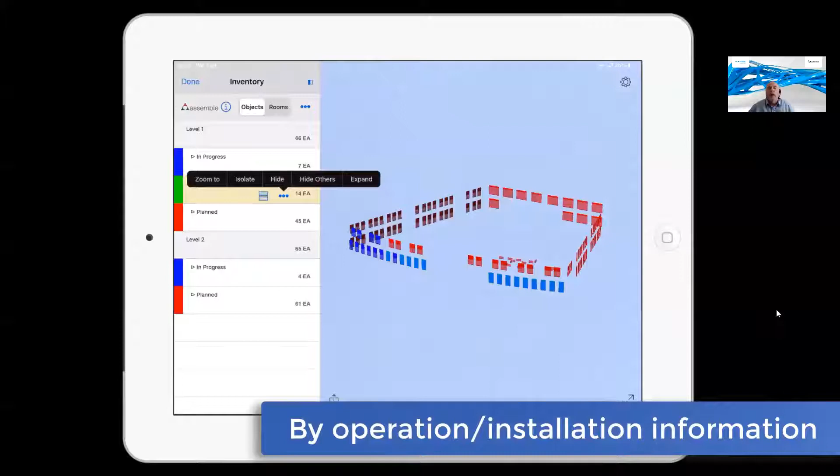So this is what I was saying about, in this case, the windows. Maybe we can check to see what windows are installed or not. So we can go around and actually check.

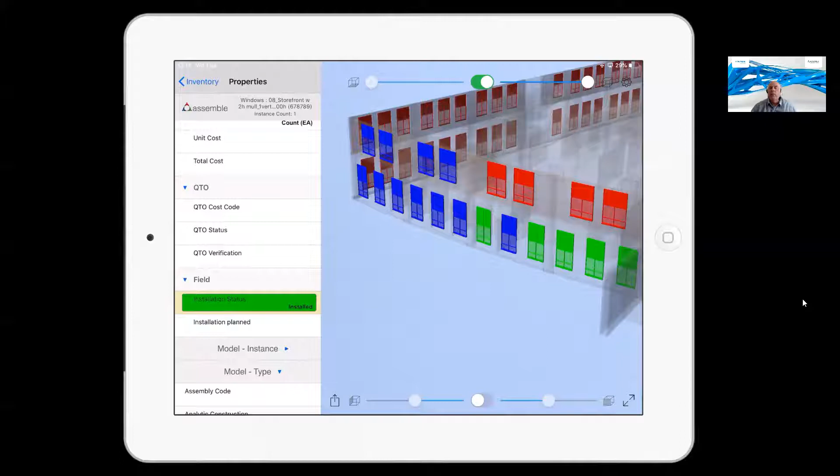Now we can feed that model with field information. What I mean is, as we're walking around - in this case maybe we're on level 1 - we can determine whether a window has actually been installed or not. The beauty is, if the object has a QR code or barcode, it will find it straight away inside the model. So if we've picked the QR code or barcode on the object, it'll tell us which one it is in the model, and we can say, well, we can change the install status to installed. That information will then be fed straight back into Assemble, and when we synchronize, that'll be there also for the Revit model as well.

Okay, so change management - let's have a look at the change management. What we can see inside change management, I quite like the way it actually colors this information. I'm going to go straight into this because obviously as the model changes, we need to synchronize that information into Assemble.

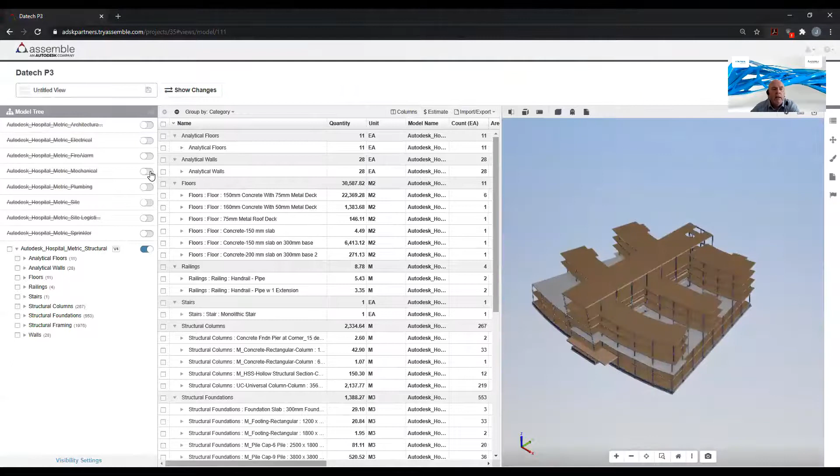And as you see here, if we turn other bits on, we can not only do version checking for one particular model, but multiple models. In this case, the architectural model is at version 4, structures at version 3. We can do comparisons across all the models, but we can also check changes between not only the latest version, but maybe version 3 to 1, and so on, so we can see overall changes as well.

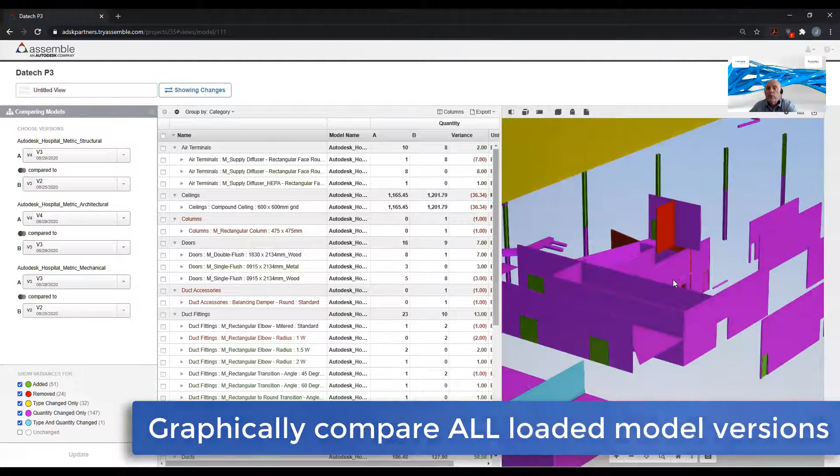And you also see the models colored. If we look at the colors here, you can see it's not just whether something is added or removed - we can also see if it's just a type change or a quantity change. So if something has just changed by length, it will color it differently. This is a really great tool for our change management.

So not only does it color it, but it also does a comparison as well. Here we've got, see, the A and B - so this is version 1 and 2 maybe, and then the variance. So we can see exactly how much it's actually changed by, and it may be an insignificant amount or a massive amount, which is going to change our quantities and maybe our ordering in this case as well.

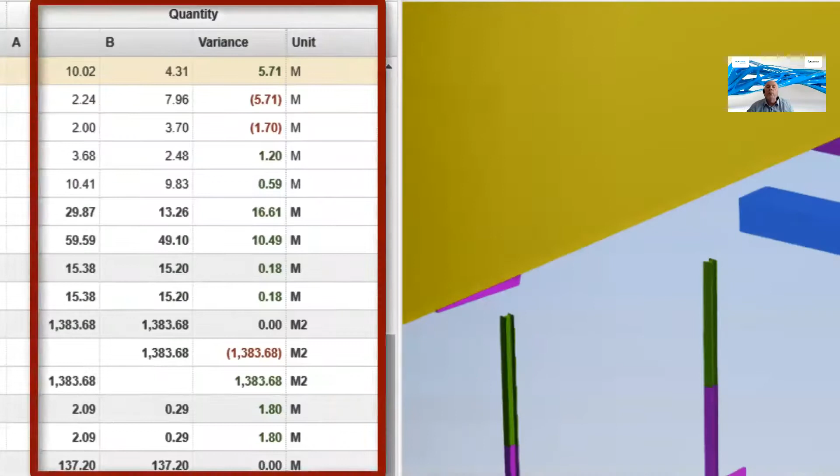So if we're in this change management view, we can hover over it and it will also tell us the change on the tooltip as well. So there's our variance.

So again, in this case for the duct fittings, it shows exactly the variance we've actually got in here. And obviously, if this information is changed, we need to export this out to someone else so we can send this off.

So in this case, we're going to have a look at the ducts. We're going to ask to show the changes. We see the changes visually, but we can also export this. So this is a duct change report that we've just created. If we open this up in Excel, here are all the changes. It gives us our quantities before and after, and the differences as well.

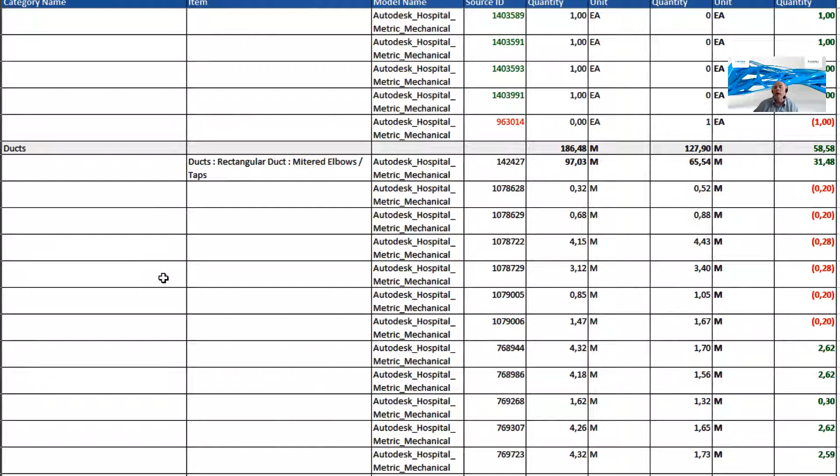The beauty also is each element inside the model has its own source ID, so we can pinpoint this. If anybody's gone in and maybe seen a previous report, they can see whether something's actually changed by that particular source ID.

So obviously this information is great inside Assemble, but we might want to see a little bit more information, so we can start to create some reports. Now we can link this information. We've seen Excel, so we've got plenty of reports in Excel, but we can also link this information to Power BI, and you can use your Power BI analysis and reporting for this. So any information you've got inside Assemble, whether it's from Revit or from an Excel spreadsheet back into Assemble, we can start to report and use some analysis on this using Power BI.

So I guess that's a whistle-stop tour through Assemble. Supported platforms: obviously the plugins that are available, they're available for Revit, AutoCAD and Navisworks, not for Revit LT. It'll work in most browsers. The only one I've not tested, but it wasn't listed, is Microsoft Edge. I didn't see that, but I believe that's going to be very, very soon.

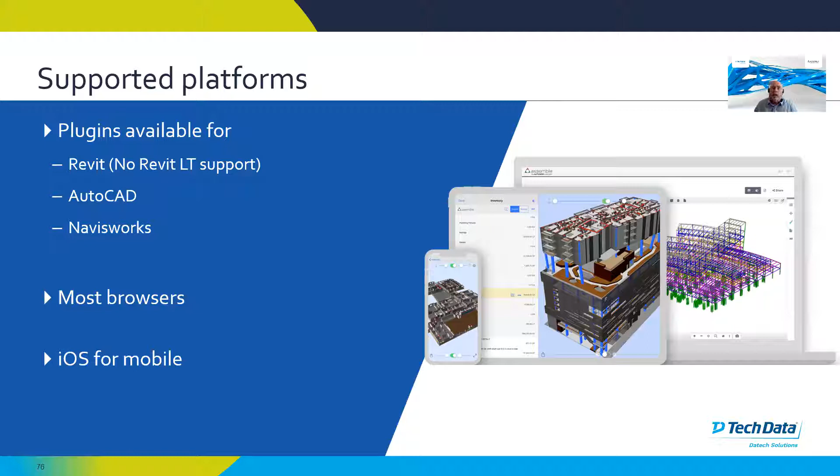And for mobile devices, at the moment it's just iOS. So whether you've got an iPad or an iPhone on site, you can use that. But again, as I said, Android is coming.

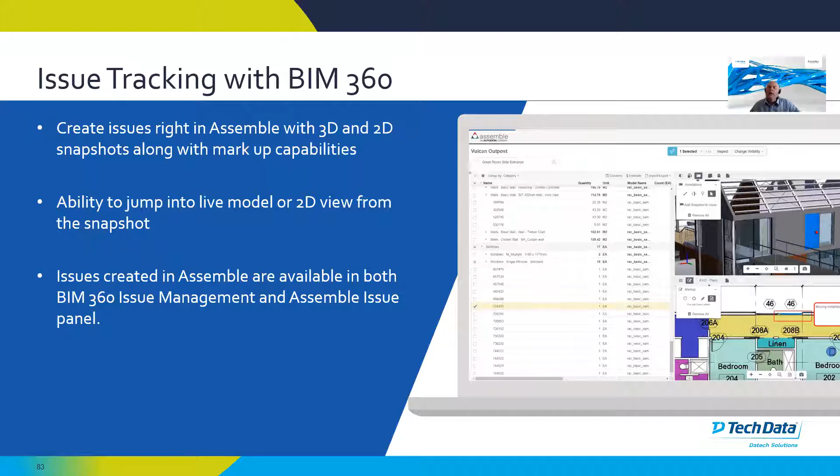They're how we want them, but they're not necessarily what's available or what's needed for the construction stage. But the beauty of this is you don't have to be a BIM modeler, an expert in Revit or Navisworks. You can very quickly start to get the views that you want with the information that you want. And what is really great as well, we can push more information back into that particular model, and that can then be fed back straight through to the Revit file, or any information we've put from an Excel spreadsheet through to assemble into the model as well.

So that just finishes off that presentation. I did notice there was a couple of questions. I think if you're okay to hang around, we can go through those questions.